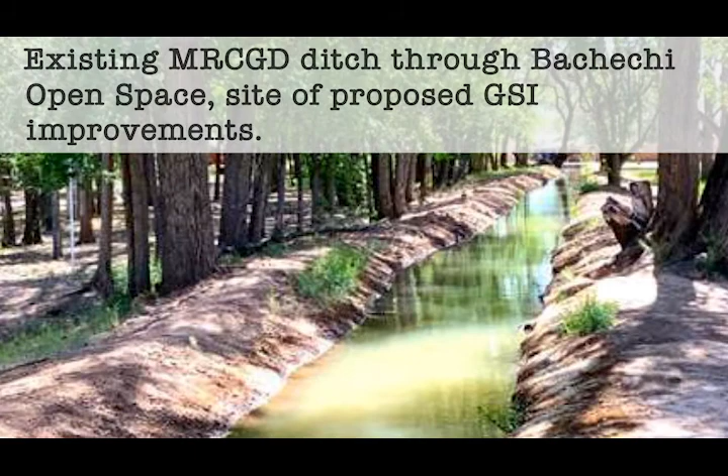This study was commissioned by Bernalillo County Natural Resource Services and was started and completed in 2020 during the age of COVID. The existing issue with the Alameda Boulevard storm drain outfall is that it discharges almost directly to the Rio Grande Bosque, and there's limited treatment of the stormwater flows before discharging to the Rio Grande.

The goal of this study was to identify opportunities to improve the water quality downstream of the pump station at the outfall, and to use Green Stormwater Infrastructure, or GSI, to provide those water quality improvements.

Part of the study was to evaluate the feasibility of various green stormwater infrastructure practices, as well as provide recommendations to the county for future implementation.

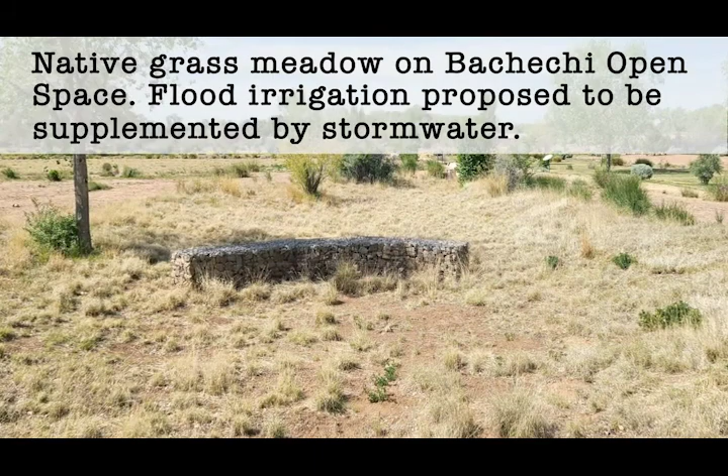The opportunities identified as part of the study are essentially that there's land available at the outfall and in close proximity for implementation of a treatment train utilizing a combination of infiltration or stormwater harvesting basins, bioswales, and a sedimentation system, a more engineered system, as part of the overall treatment train approach.

The outcome of the study were the three concepts you're seeing on the screen: one for a treatment train within the Rio Grande Bosque, another for a treatment train on Bachechi Open Space, which is a Bernalillo County maintained and managed open space, and then a third with a more confined or smaller footprint also in the Bosque.

The study outcome was a report that will allow Bernalillo County to seek funding and to plan for these improvements and construction in future years.

The 4th Street Master Plan was created to be a blueprint for the revitalization of this remnant of the much celebrated Route 66 into a center of Los Ranchos activity, with the lofty goal of providing an economically, socially, and environmentally sustainable Main Street. The plan envisions a street that is well integrated into its surroundings while providing a foil for commerce and civic activity.

At the same time, it sustains its landscape through a water-sensitive approach to design and construction, an example of how doing the right thing can coalesce our precious water resources with aesthetics and land use benefits. It is a street and a pedestrian corridor.

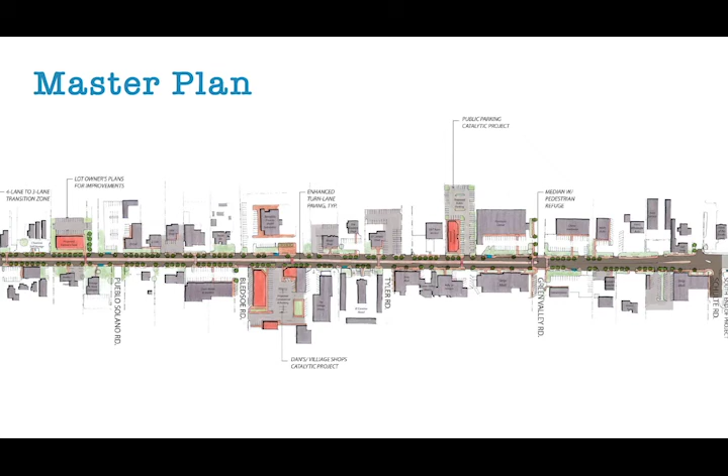It is also a water sponge and a water safety conveyance that will age gracefully into its North Valley home in such a way that it is greener and more water conservative than traditional streets.

Before this project was built, the street was wide with 4 lanes of traffic, no lighting, no sidewalks or any form of pedestrianism, no stormwater treatment of any kind. Landscaping was pretty much non-existent, and street flooding caused many users to run for the high ground. There were also bars on many of the windows of buildings and vacant properties throughout the corridor.

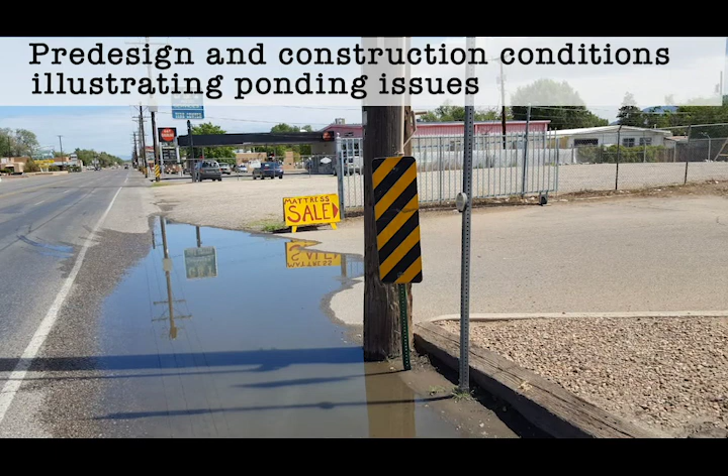Parcel and building owners were very hesitant to make any improvements on the street until there was some change to it. The 4th Street revitalization envisions walkable and safe spaces for pedestrians, beautiful permeable pavements in both walkways and street sections.

Places to sit and enjoy a cup of coffee or a meal, edible landscaping, shade, on-street parking as well as a new village parking lot which is also permeable, lighting, green infrastructure, slower traffic and bus stops for the many transit users along the street, and other amenities.

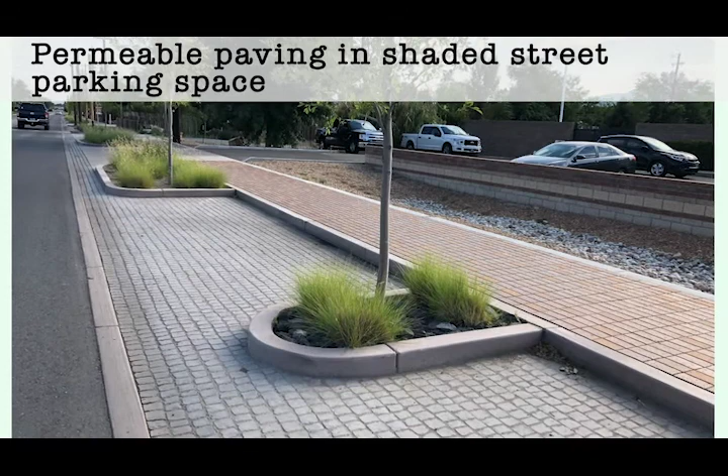The landscape, modeled after the village's agrarian roots, uses grasses and herbs as metaphors for fields and gardens, and fruit trees as symbols of the orchards that are interspersed throughout Los Ranchos.

The street also imagines events which should take place from time to time, and linkages to points to the south, like the forthcoming village center for Los Ranchos. In the next few slides, we will illustrate some of the features of this remarkable new street.

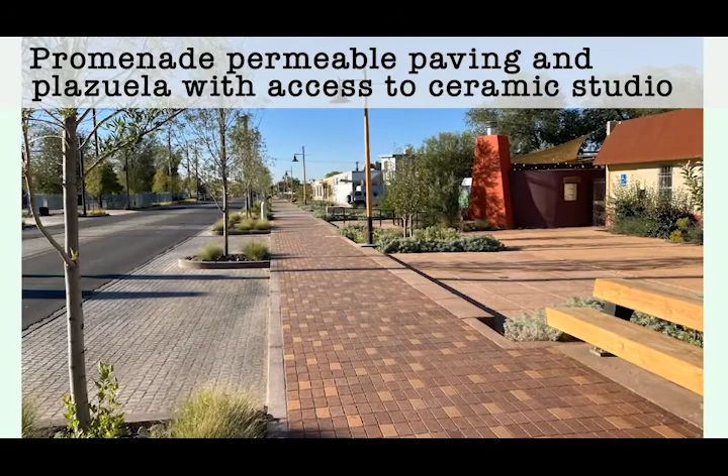The permeable street gutters, parking spaces, and other parts of the street section of the streetscape are reimagined as water collection devices, street basins if you will, as well as tasteful and well-designed additions to the stormwater system. Perhaps as important, they are also locally manufactured.

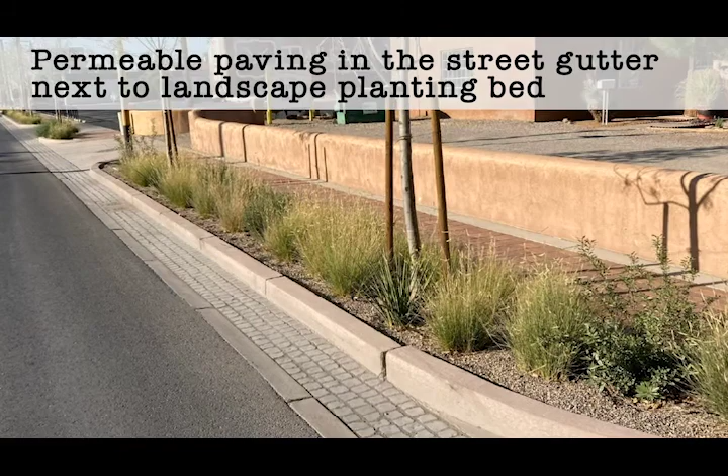When it rains, these areas collect water from impermeable street sections and drain it through these cobblestone street basins, and then let stormwater gently drain to subsurface collection systems through the permeable grout at the cobblestones.

We should also note that the grout is designed in two lifts to allow drainage, but also to capture dirt and dust through a finer surface lens that will then be collected by the Village of Los Ranchos maintenance staff.

The subsurface structures below the cobblestone basins then collect stormwater through filter fabric protected gravel, and finally into perforated pipe passive irrigation systems that then deposit the stormwater in planting beds through subsurface wicks, and finally to subsurface reservoirs that drain surplus water into valley groundwater, our aquifer, to create a sustainable approach for both passive irrigation and groundwater injection.

There are 10 collection systems, 5 on each side of the street, organized throughout the corridor. Each subsurface reservoir has maintenance manholes to allow the village access for cleaning.

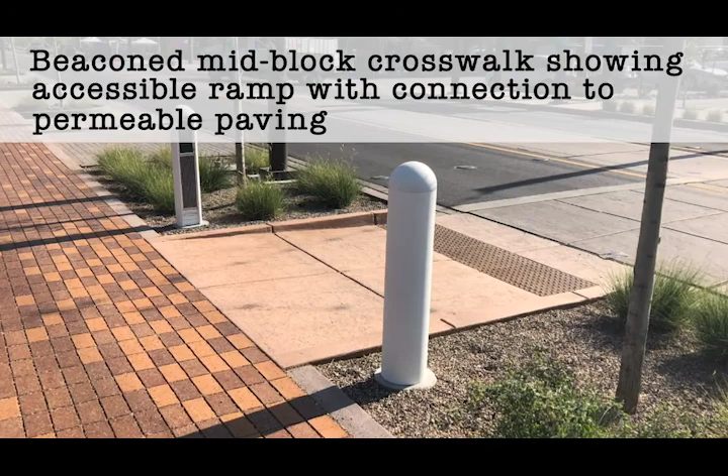There is also a smaller subsurface drainage system in the promenade, designed similarly to collect water and deposit it through wicks into planting beds with fruit trees, herbs, and other edible plants. These planters are also demonstrations of the larger agricultural farms throughout the valley.

The 4th Street Revitalization Project not only changed the face of this historic remnant of a past highway system, it also shows a way forward to a more sustainable future. The project improves the pedestrian experience and at the same time uses permeable pavement to return storm flows to where they are needed. It provides parking in a logical progression of spaces down the street, and it also cures the street's prior stormwater problems as it feeds landscaping and the aquifer beneath the valley floor.

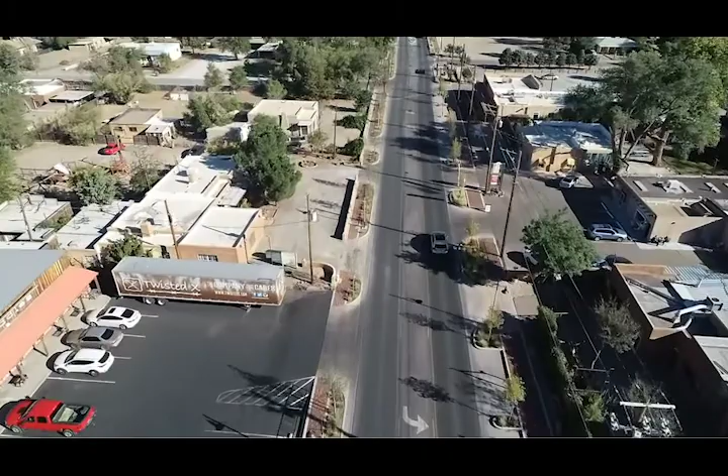This project is not only a street, it is a living room for the village and a great room for others to visit. The thing that makes this part of 4th Street special is that it is not just about LID. It is not only about improved safety or lighting or landscaping. It provides Los Ranchos with multiple layers of positive change that sets the village up for its future as one of the special places in the Albuquerque metropolitan area.

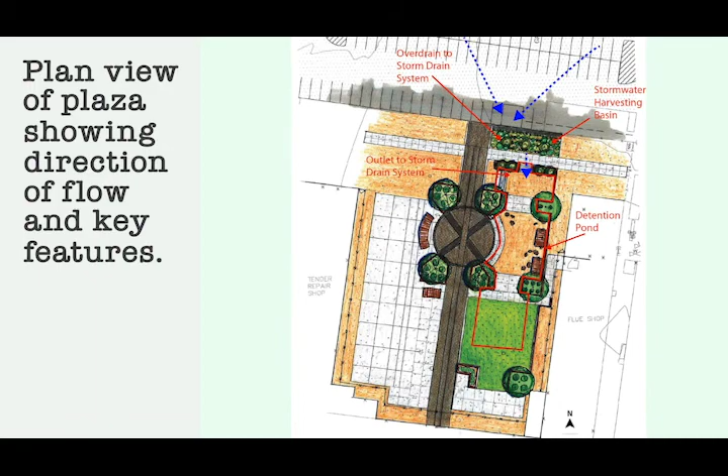A strip of basalt aggregate forms a sediment trap along the edge of the parking lot. Eventually, the basalt will become stained by pollutants in parking lot runoff, but the dark color of the aggregate won't show the staining like lighter color aggregates do. The sediment trap also collects trash like cigarette butts.

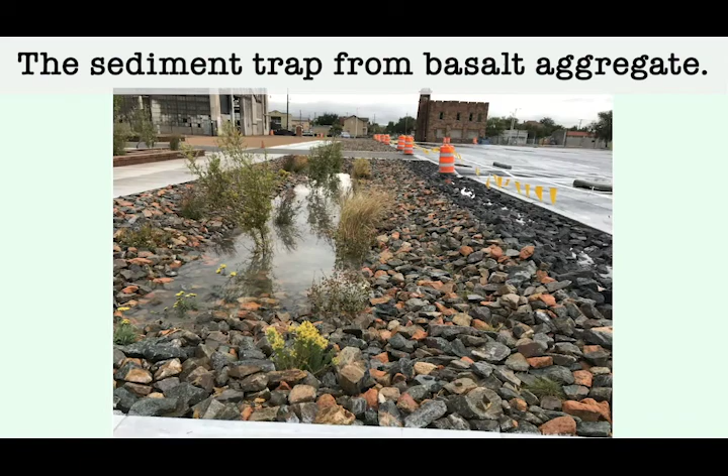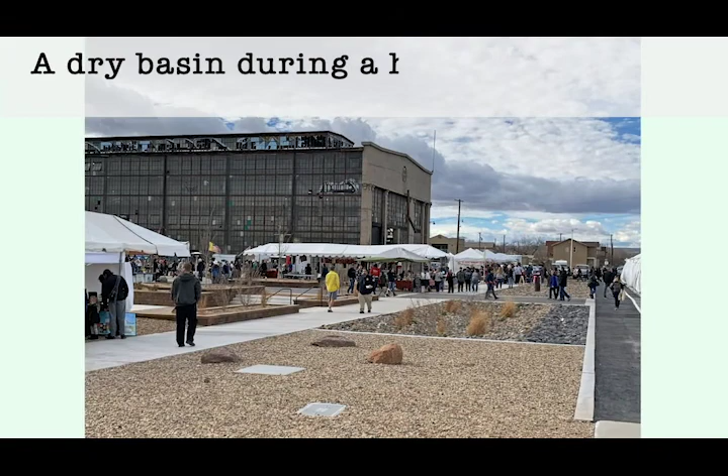This pre-COVID photo of a craft fair at the plaza highlights the visibility and educational potential of the stormwater harvesting basin.

The beehive overdrain, seen in the foreground, connects to the storm drain system. Runoff that enters the overdrain has been filtered by plants and mulch so that the water being discharged to the river contains fewer pollutants. A symmetrical planting design ties into the symmetrical plaza design and would make it easier to identify any unintentional plants which may be weeds.

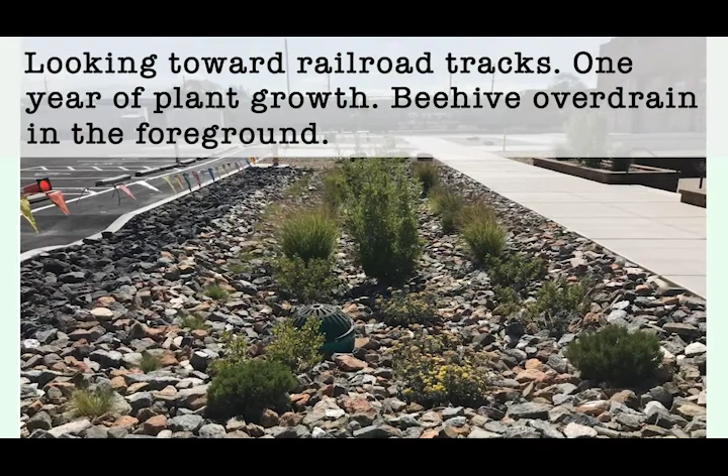The plants selected for this basin tolerate inundation and provide a buffer between the parking lot and plaza. Large trees were considered, but not ultimately included due to the utility lines running under the basin.

The plaza was designed to accommodate gatherings of many sizes and types. We hope that soon these events will be allowed to safely happen once again, and that you will be able to attend a gathering at the plaza at the rail yards.

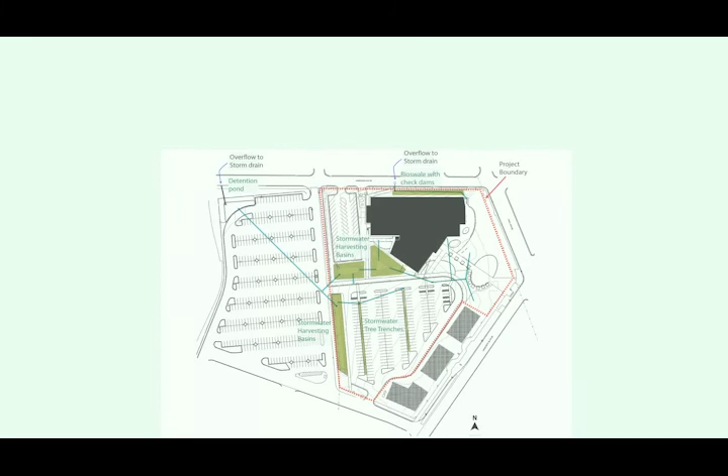This site plan shows parking lot and roof runoff being directed to tree trenches and stormwater harvesting basins that are connected to one another by a series of piped drains to create a treatment train. Overflow from these features is directed to a traditional detention basin in the northwest corner of the site before entering the storm drain system. The combination of gray and green infrastructure allowed for flexibility to meet grading limitations.

The two main stormwater harvesting basins were seeded with native grasses and wildflowers and planted with oak and desert willow trees. Soil sponges in the basins help to promote infiltration. This basin is closest to the building and is the smaller of the two basins.

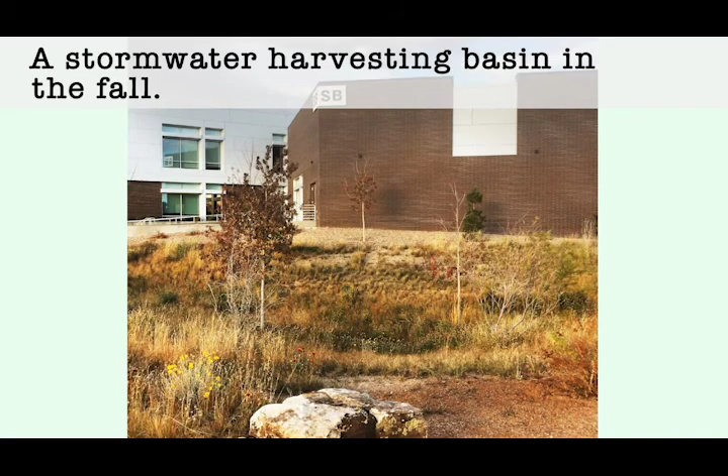The revegetation seeding received irrigation for a 2-year establishment period, but now survives on precipitation alone. C&M maintenance staff did thorough hand weeding for 2 years, which allowed the grasses to become dominant. The trees and shrubs in and around the basin have permanent irrigation. This project was certified LEED Gold, and on-site stormwater management was only one of the sustainability goals that were met.

Last summer, cattails were found to be growing in one of the basins, adding to the habitat benefit provided by this landscape.

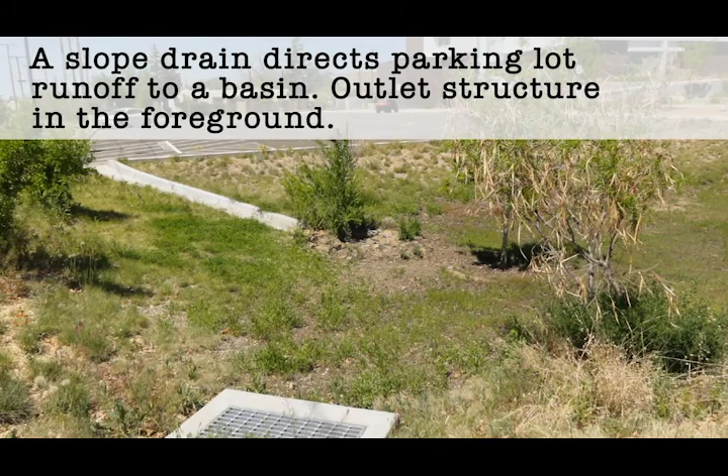The second stormwater harvesting basin receives overflow from the first basin, as well as runoff from the two parking lot areas. As you can see in this photo, runoff from one of the parking lots enters the basin through a sloped drain. Overflow enters the outlet control structure in the foreground, which is piped to a detention basin in the northwest corner of the site.

The C&M Sustainability Program added interpretive signage to the project to increase the educational impact of the landscape.

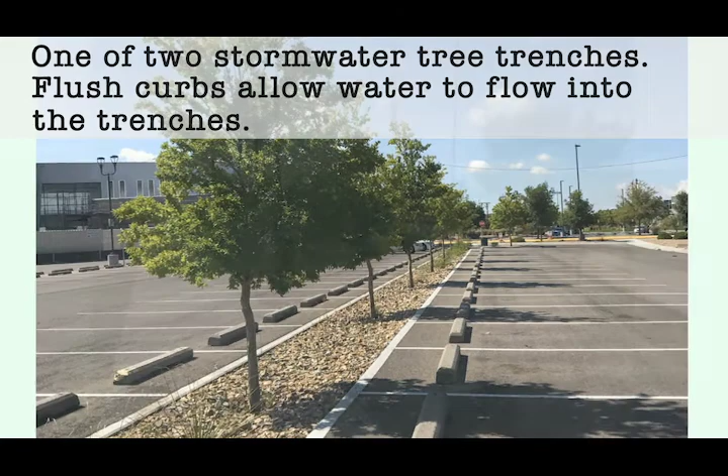Collaboration between the architect, engineer, and landscape architect allowed integration of water harvesting features throughout the site in order to capture and filter stormwater.

The result is a beautiful landscape that also functions to filter pollutants, decrease potable water use, mitigate heat, and provide habitat.

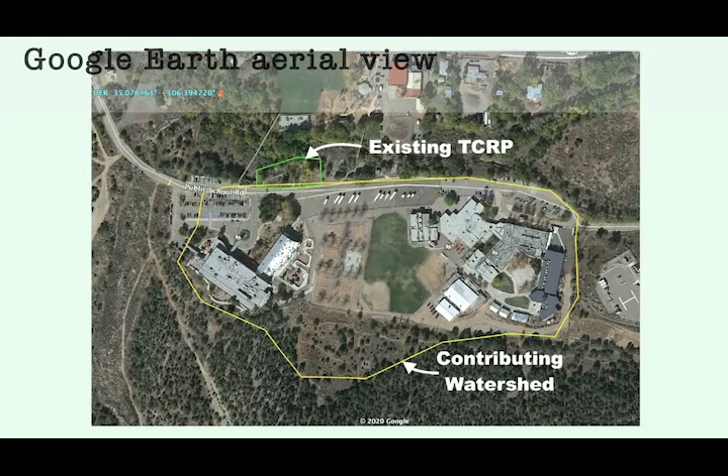The Tijeras Creek Remediation Project serves as a publicly accessible model demonstration of an integrated stormwater treatment train. The site itself is constructed on less than three-quarters of an acre and provides the watershed services for over 20 acres of impervious surface.

The project consists of surge basins and bioswales, all networked together in a sinuous manner with progressively larger basins one after another to maximize the settling out of solids in the stormwater, as well as allowing for a more focused biological response to help mitigate both the pollution and increase permeability of the soils.

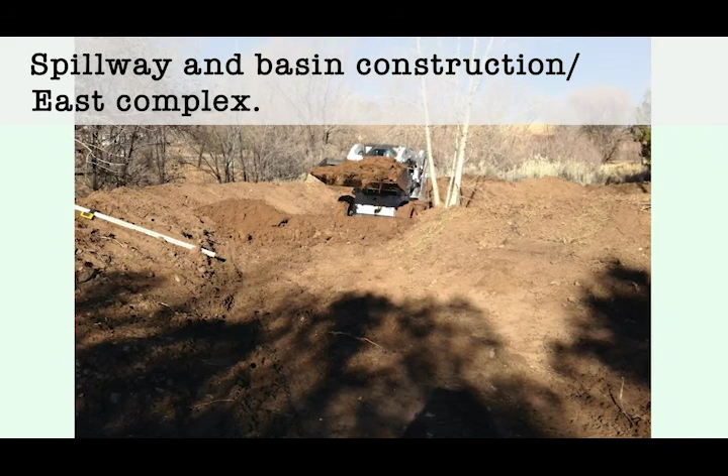The construction was done mostly by volunteers and by the project manager and staff.

Maintenance is primarily the removal of trash, monitoring growth of vegetation on spillways to control the elevational height, and removal of invasive species. This site was characterized by Siberian elm infestation, which you can see the magnitude of.

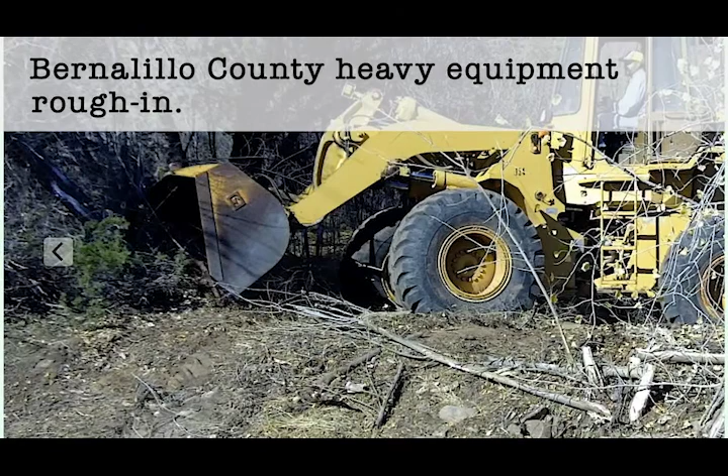We have soil sponges installed throughout the low water areas. Those really contribute to improved permeability as well as increasing field capacity, the water holding capacity of the soils, and the infiltration and exfiltration rates have increased hugely through the last 6 or 7 years while this has been built.

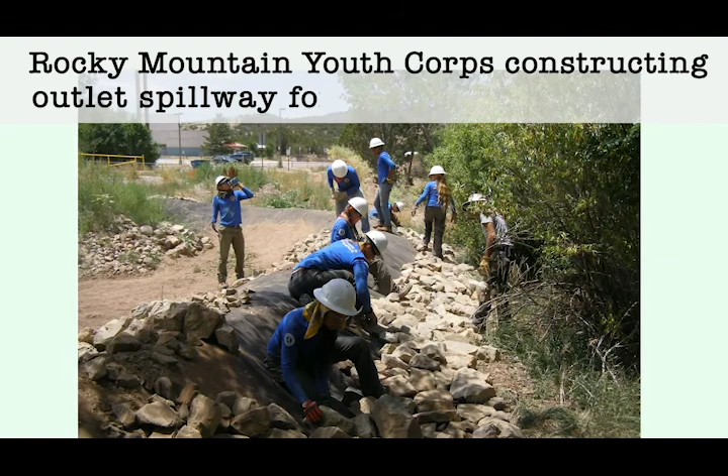Through the hands of many volunteers, the Rocky Mountain Youth Corps, UNM, Nature Conservancy, Bernalillo County Master Naturalists, and many others have contributed while going through an educational opportunity.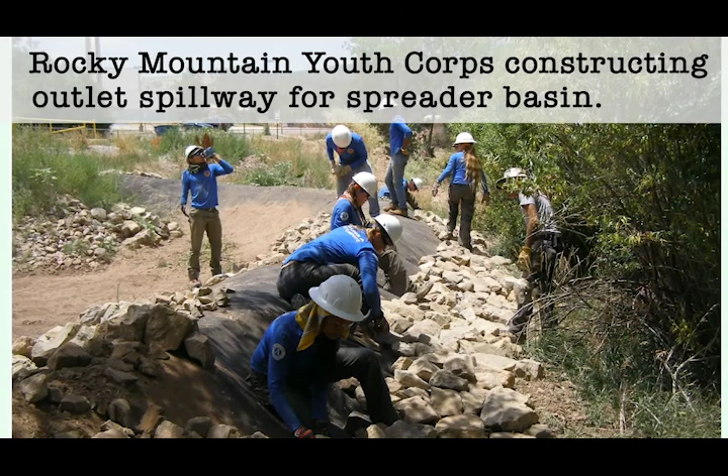People are able to see that this project is actually achievable. You can have a beautiful stormwater flow instead of gray infrastructure. We're delivering much cleaner water to the creek, as you can see in some of the footage.

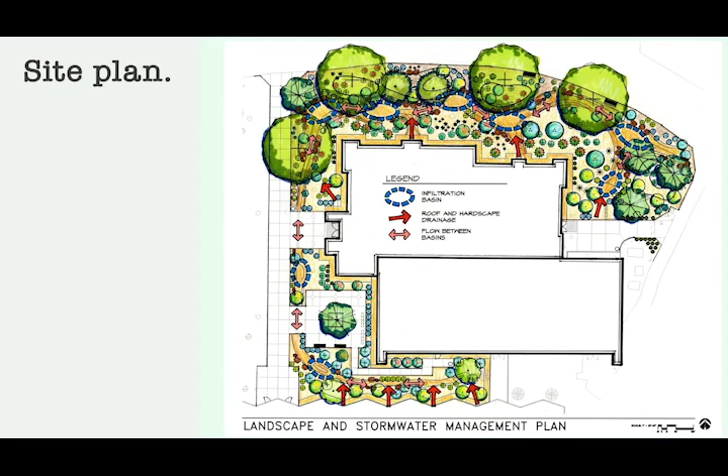This was the first significant water harvesting landscape constructed on the UNM campus. This project was certified LEED Platinum. At the time construction was completed in 2010, this was the first LEED Platinum certified project in New Mexico.

A canyon-like condition is created between the south side of the College of Education and the north side of Travelstead Hall. The swale collects roof runoff from both buildings. The runoff from Travelstead Hall falls from canales into raised metal collector basins that overflow into the swale.

Native and low water use plants in the landscape north of the building create a habitat pocket. Plants lining the swale receive supplemental irrigation from roof runoff.

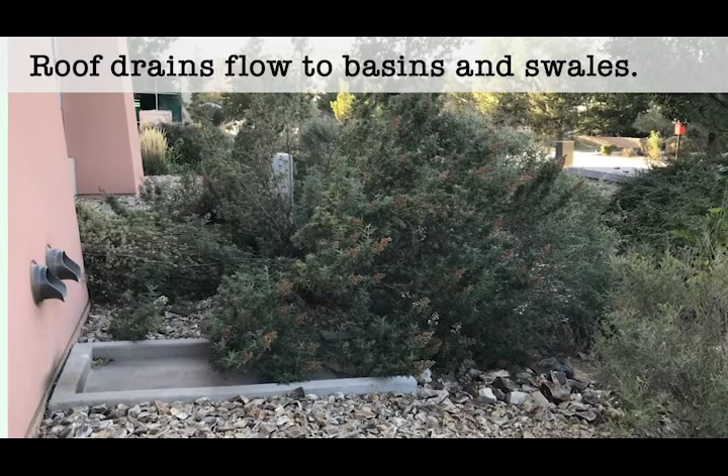This project incorporated organic mulch in the landscape adjacent to the swale. At the time of design, organic mulches were not used in campus landscapes. In the years since this landscape was installed, organic mulches have become commonly used on campus, and UNM now generates organic mulches for use on campus landscapes.

Here you see a swale along the north side of the building with adjacent native and low water use plants. This metal basin mounted on a concrete block catches runoff from a roof downspout above the basin. Water flows from the metal basin into the swale that wraps the building.

This video shows the roof spout above the metal basin and the path that runoff takes as it flows from the basin into the swale and around the building.

We hope you enjoyed this virtual tour of the UNM College of Education and encourage you to go visit the project in person.

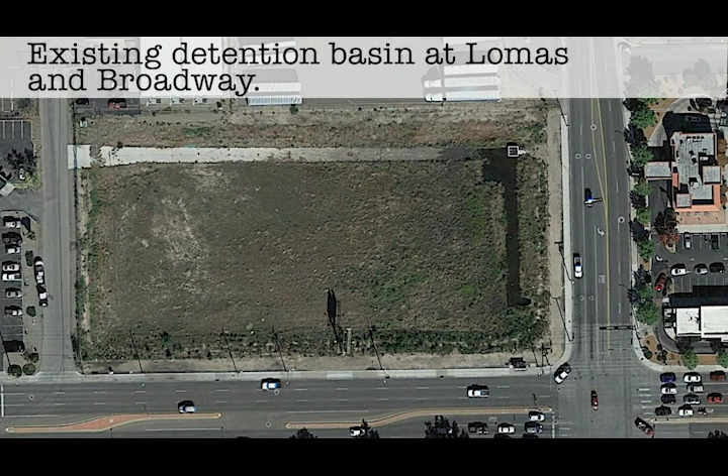Detention basins offer a highly efficient means of managing stormwater during infrequent but intense storm events, holding the excess water only until it can safely be returned to the drainage infrastructure network. However, these basins require significant area, are typically closed off to the public, and don't offer many benefits to the community or ecosystem. But what if they could? And what would that look like?

Take for instance the 2.7-acre detention basin at the northwest corner of Lomas and Broadway in downtown Albuquerque. Right now, it's basically a big hole in the ground at a very prominent intersection. As Albuquerque only sees an average of 50 days of rain per year, this basin's actually only in service for 10% of the time. But what about the other 90% of the year when the space is not in service? And what about all that water?

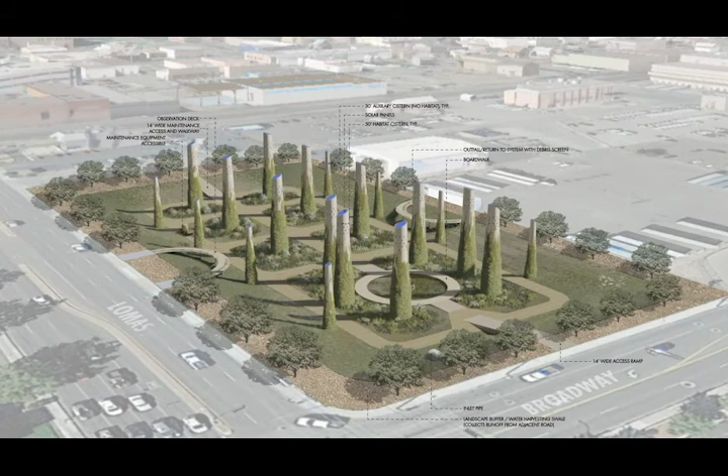Could we take advantage of the 15 acre-feet that inundates the basin during each event and use it to create something more? The Water Cathedral is a response to this challenge and may serve as a prototype for detention basins around the world, especially in denser urban areas where extra space isn't always available.

The purpose of this project was to reimagine what a traditional stormwater detention basin could be and to create a place of refuge for urban inhabitants, both human and non-human alike. It also seeks to showcase critical water infrastructure and hydrology processes by celebrating the ephemeral storm events that activate the basin, fostering opportunities for people to interact with what is typically hidden away or not easily understood.

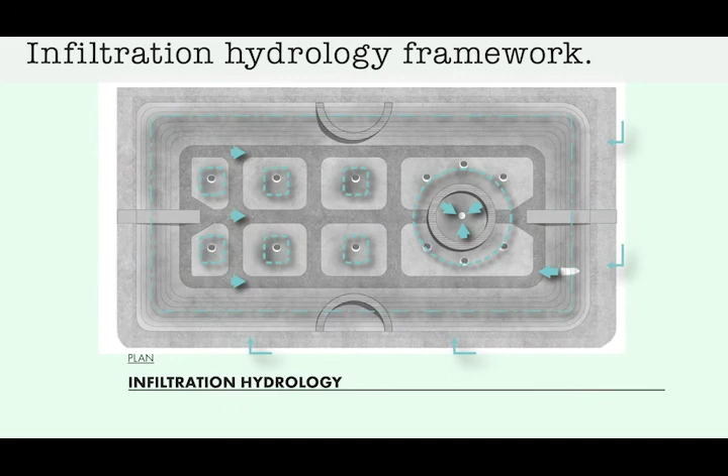The overall design framework is driven by the site hydrology and uses both passive and active stormwater management techniques. In addition to maintaining the original function of the basin, several other strategies are utilized. First, stormwater from the surrounding roadways at the top of the basin is conveyed and infiltrated through a continuous swale which supports a vegetated buffer around the site. The overflow is then carried into the larger basin.

Secondly, the bottom of the primary basin is comprised of a series of smaller connected microbasins that allow for increased infiltration time after the flooded basin has emptied. The third is a system of vertical cisterns located at the center of each microbasin, designed to capture and store a large percentage of the stormwater that inundates the basin during each event, storing water vertically rather than horizontally.

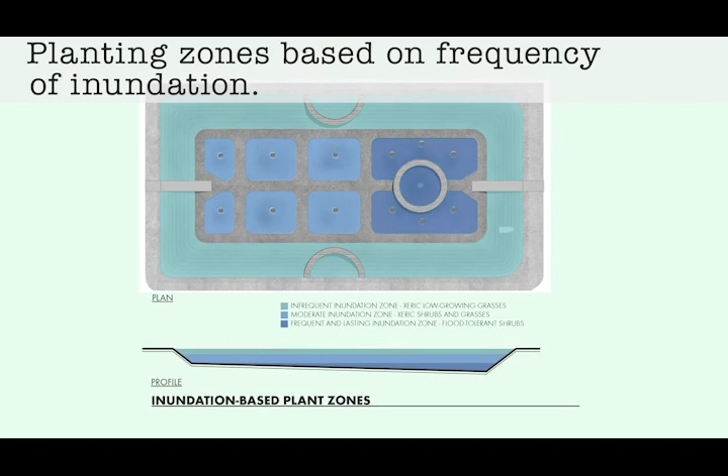The planting palette and landscape typologies are based on inundation tolerance and the basin's frequency and intensity of inundation. For example, less tolerant species are placed at higher elevations where the basin water level does not usually reach. More hydrophilic species are cultivated in the microbasins at the lower elevations, where inundation will be more frequent.

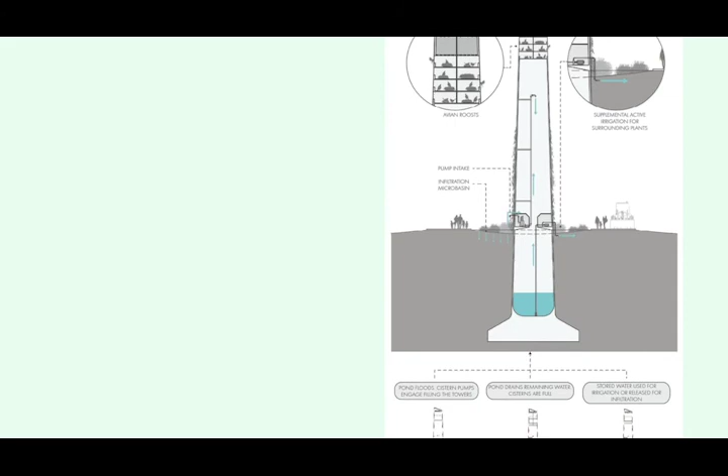The primary active water storage features are the habitat cisterns, designed to function like trees, soaking up water when activated by flooding and slowly releasing it to support their foliage, while serving as a roost for avian and bat species. Collectively, they store 576,000 gallons or 1.75 acre-feet when full, adding almost 12% to the basin's normal capacity.

From just one large event, the habitat cisterns can provide enough water to be used throughout the year to irrigate and sustain the surrounding habitat areas with zero reliance on potable water.

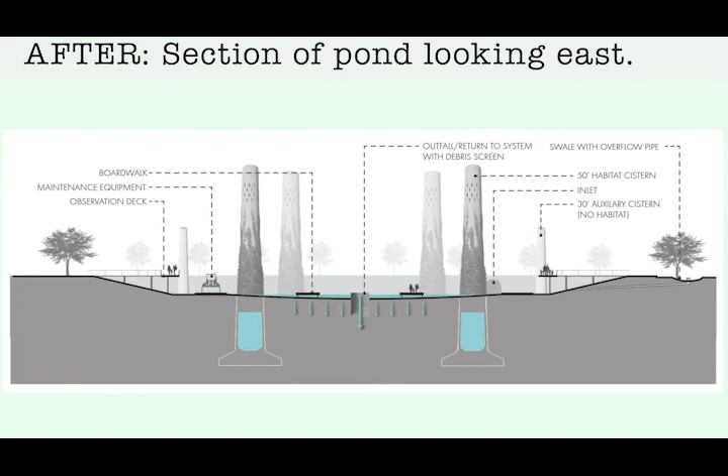In looking at the elevations of the project, we can now see in more detail how the various water management strategies are interconnected and apply the principles of GSI and LID. Additionally, elements such as the observation deck, boardwalk, and the striking forms of the habitat cisterns demonstrate how this new typology can create interest to provide an effective means of interacting with water infrastructure and urban wildlife.

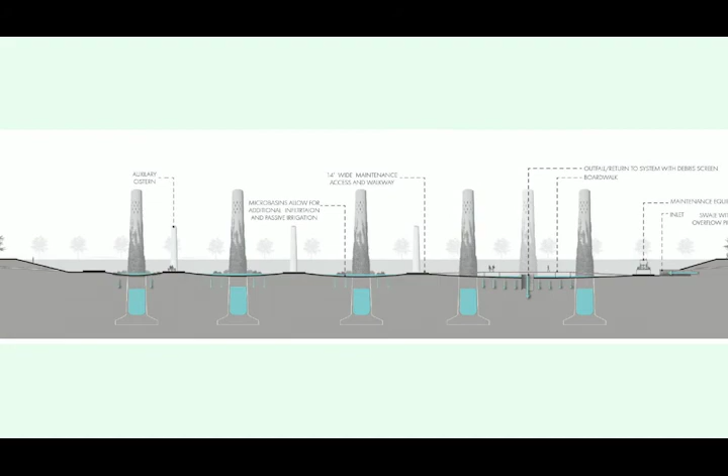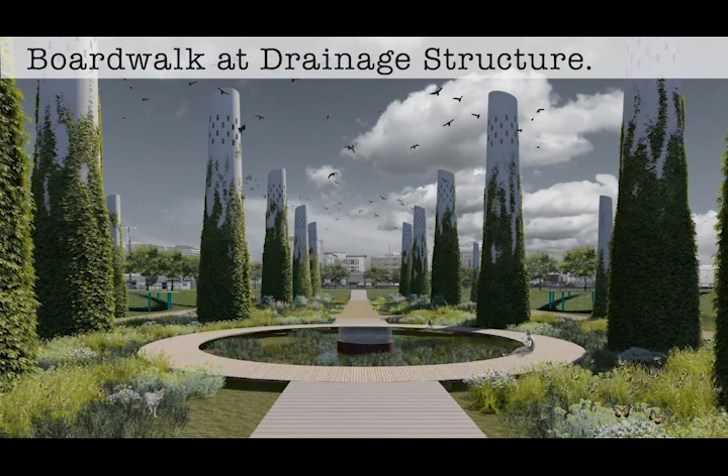Resembling the ruins of a Gothic cathedral, the column-shaped habitat cisterns create an appealing aesthetic and sense of enclosure, offering an experience of promenade along a central axis to the drainage outlet of the basin as a focal point and art piece, or altar, symbolic of the preciousness of water in the desert. With a raised boardwalk surrounding the drainage structure, the basin is also accessible even when the residual stormwater has not completely infiltrated.

In closing, infrastructure doesn't have to be boring and sterile. It can be much more, and the Water Cathedral shows us proof of that. When it's dry, let's make it a usable space. When it's flooded, let's celebrate the valuable function it plays in keeping us safe while at the same time reusing and returning every possible drop to the surrounding soils, not someplace far downstream.

So the next time you pass this site, or one like it, please ask yourself, or perhaps the flood control engineer sitting next to you, what more could it be, and what can we do to help?

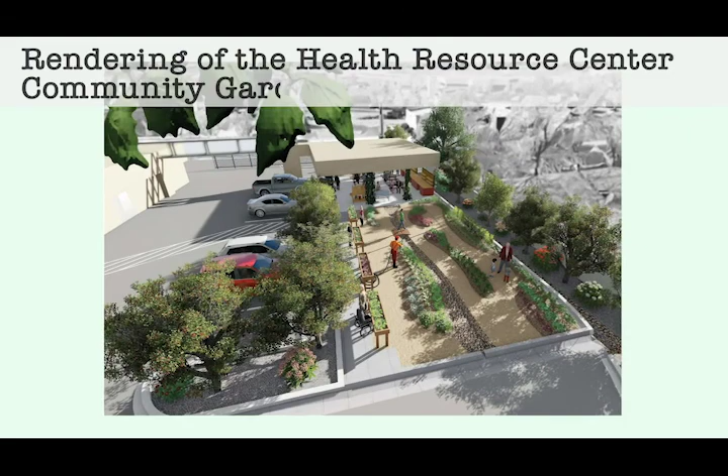As you can see in the rendering, the garden was constructed in what used to be a bank drive-through, so it provided a really great opportunity to demonstrate soil remediation and water harvesting, and the relationship those practices have with each other in support of growing edible plants in an urban environment.

All of the water from the roof of the resource center and the parking lot is directed to the pollinator garden area along the western edge of the site and the water catchment basin at the south. The land within the vegetable garden area is contoured to keep the water that falls there in the garden.

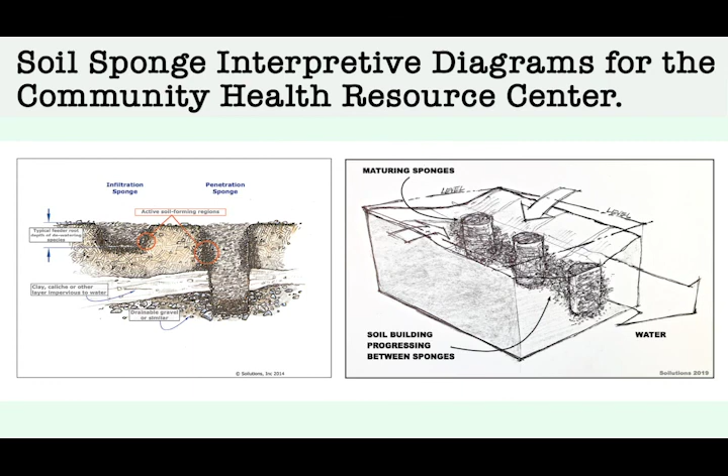Once people saw how simple the sponge installation is, they said, well, I can do that at home, I can do that in the parking lot. A temporary irrigation system was also installed to irrigate the sponges and provide that much needed activation of microbes to initiate the remediation process.

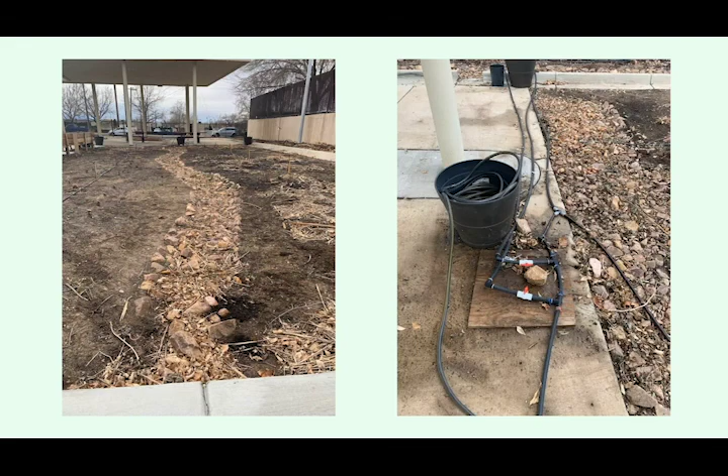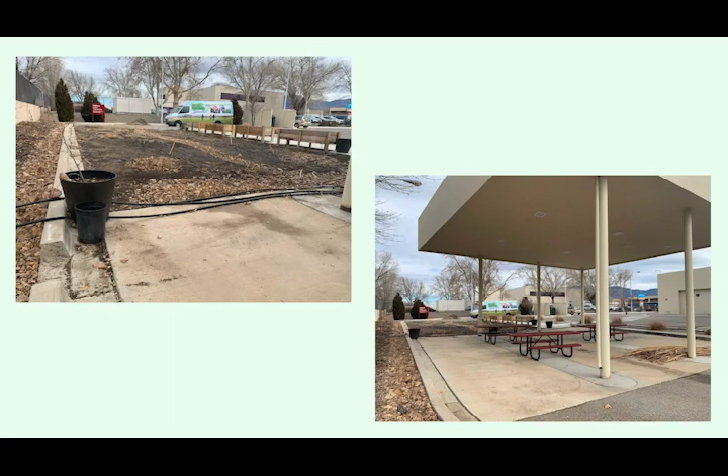Cost of water was the top barrier identified, with broken irrigation system not far behind for urban gardeners, making the integration of passive water harvesting and urban agriculture projects critical for garden sustainability. So this project was really key in helping our team make recommendations for how Bernalillo County can support the inclusion of water harvesting in community urban agriculture.

And just a quick plug for the Presbyterian Health Resource Center, if folks aren't familiar with it, it provides access to resources like teaching kitchens, community meeting and activity space, and a food pharmacy, which is a referral-based food pantry that provides healthy food to those who are food insecure. The location is also a stop for the Healthy Here program's mobile farmers market.

Hello, my name is Aaron Kaufman. I am the founder of Southwest Urban Hydrology, a business that focuses on green infrastructure and remediating the impacts of urban growth on watershed health. I also happen to be a graduate of Santa Fe High School.

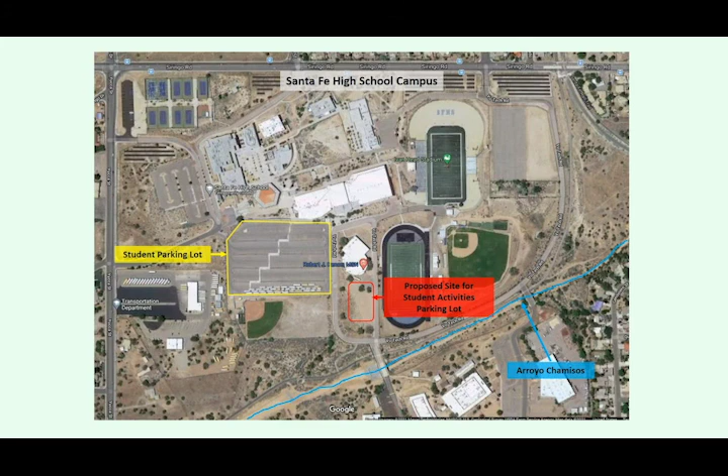The Santa Fe High School campus is roughly 80 acres and comprises numerous impervious surfaces, including staff, student, and activities parking lots. The parking lots discharge large volumes of stormwater, lack habitat value, and contribute to urban heat island effect.

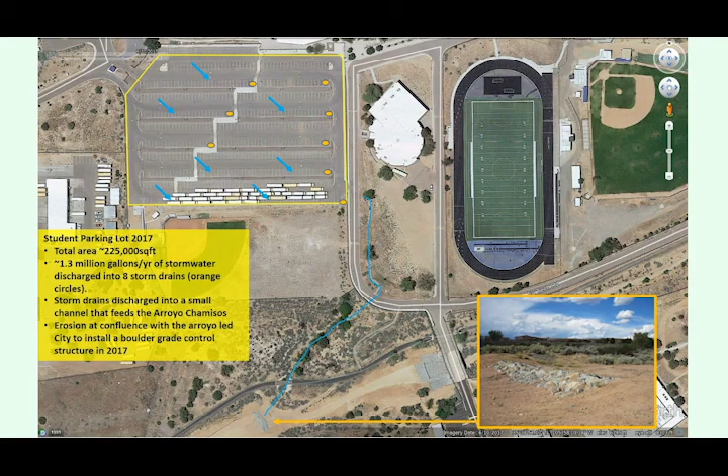Severe erosion in the channel led the city of Santa Fe to spend over $1 million to stabilize several stretches of the arroyo, including a section near the Santa Fe High School campus. In July 2018, a high-intensity 3-inch storm event caused widespread damage in Santa Fe, including parts of a boulder grade control structure in the Arroyo Chamisos.

While this singular event was not the catalyst for changing the parking lots at Santa Fe High School, there was a growing recognition among members of the facilities department that stormwater harvesting principles could reduce erosion and contribute to irrigation for improving tree cover.

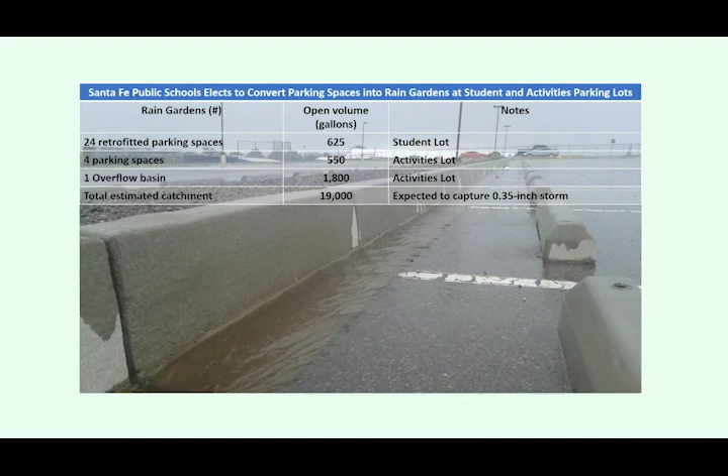In 2019, a total of 24 parking spaces were retrofitted across 4 terraces in the student parking lot. Each rain garden was intended to capture runoff from about 13 adjacent parking spaces, or roughly 3,500 square feet. 4 additional rain gardens, as well as 1 larger basin, were included as part of the new activities parking lot. On average, the basins are intended to help capture about a 1/3 inch storm from all parking surfaces.

Parking spaces in the student lot were given a new curb and gutter border. Approximately 20 inches of underlying soil and base course was excavated and removed from each parking space. Limestone boulders were hand-selected to be used as decorative dry stacked borders as part of the sediment traps.

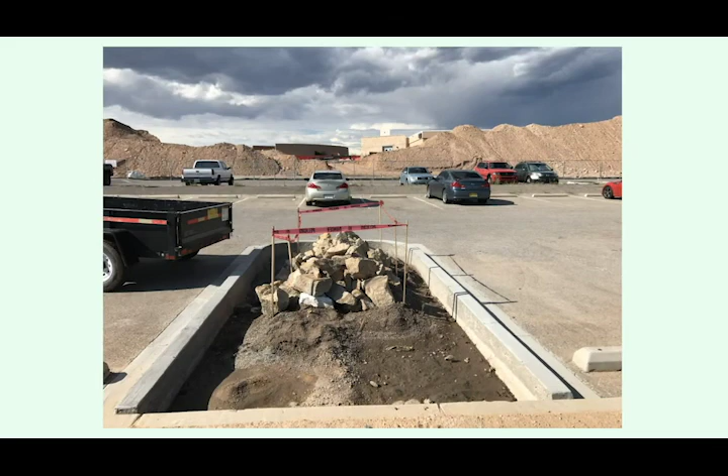Approximately 2 cubic yards of compost was added to improve soil nutrients in each rain garden. Some of the compost was purchased from a local business that utilized food scraps from Santa Fe Public Schools. A small excavator was used to loosen soils 2 to 3 feet in depth for better infiltration and easy root expansion.

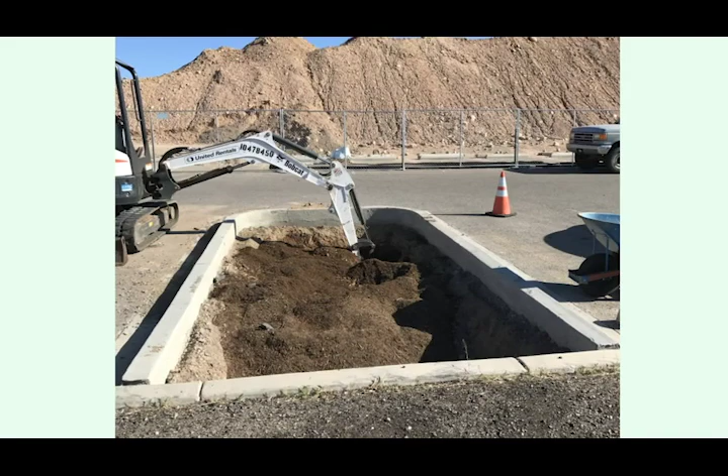Each basin received a 2-inch caliper tree. Species were selected to be drought tolerant and capable of withstanding temporary inundation during storm events. A cobble mulch was hand-placed in the basins to prolong soil moisture between storm events and prevent erosion during high-intensity storms.

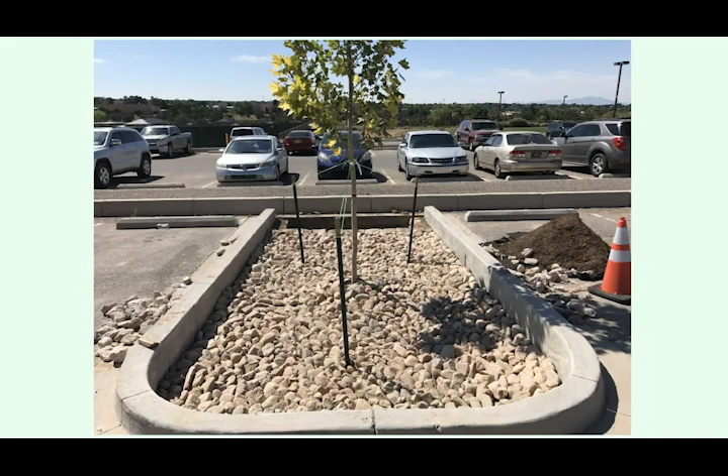One-gallon bunch grasses were used in sediment traps to help remediate stormwater pollutants. A variety of 5-gallon shrubs were selected to improve pollinator habitat and provide forage for birds or other wildlife.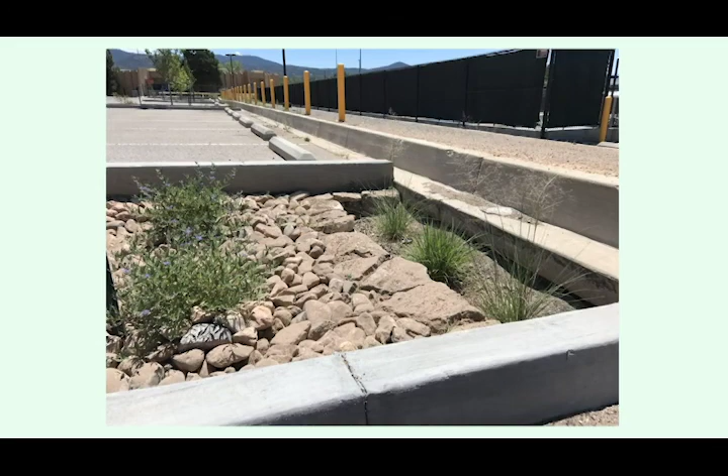In addition to remediating stormwater pollutants, the tall bunch grasses in the sediment traps are intended to divert pedestrians away from the deepest parts of the basin. During the winter, the sediment trap grasses provide great color while other plants are dormant.

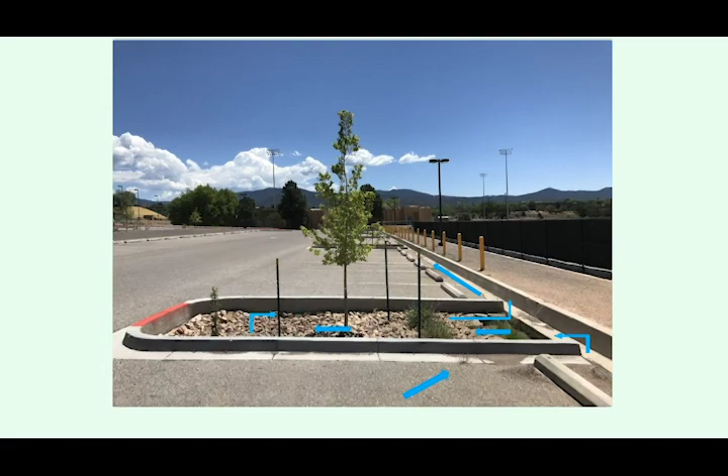Stormwater from about 3,500 square feet is directed along the original curb and gutter where an inlet and outlet exist. A small cement baffle in the gutter directs water into the rain garden sediment traps. After a basin fills, excess stormwater will flow to the next rain garden or to a storm drain.

Standing water in the rain gardens during large storm events will reach about 6 inches in depth before stormwater overflows. The base of trees were planted 1 or 2 inches below the elevation of the gutters to ensure that they would not be inundated for long periods of time. Most rain gardens drain in less than 24 hours.

2020 was exceptionally dry. However, soils in the rain gardens were moist and probably could have supported established vegetation without supplemental irrigation. 100% of plants were alive as vegetation entered dormancy in the fall of 2020.

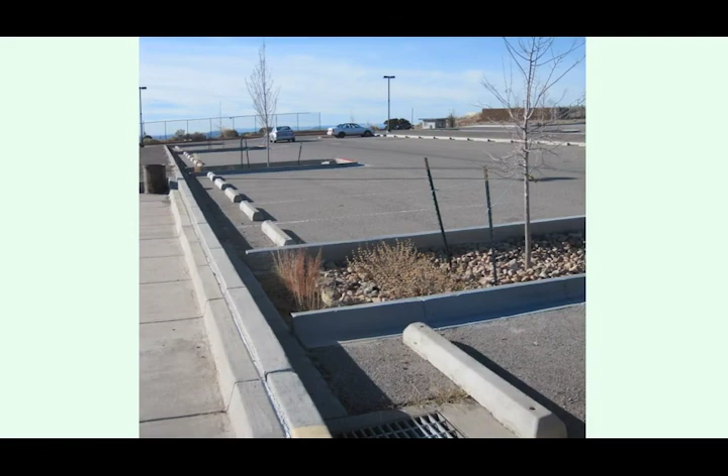Trees did not exhibit much growth during the first year. However, most of the grasses and shrubs grew vigorously and provided flowers for pollinators. While the trees are still young, the underlying surfaces appear to be maintaining slightly cooler temperatures, which bodes well for future remediation of urban heat island effect caused by the parking area.

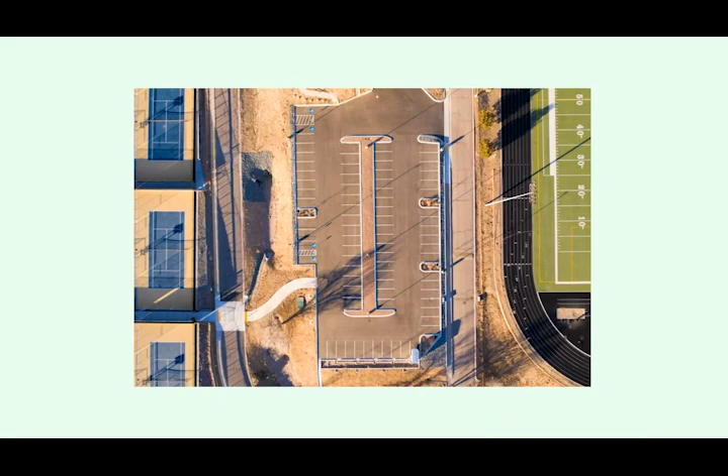The final basin completed as part of the rain garden project at Santa Fe High School was a 96-foot long, 6-foot wide rain garden on the south end of the activities parking lot.

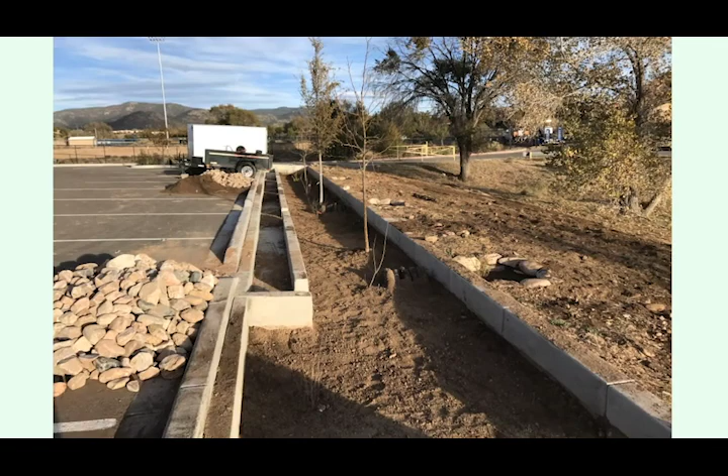The basin was excavated and trees were planted during the first week of November 2020. Student volunteers visited the site a week later and planted the remaining vegetation before mulching the area. The basin has an open volume that exceeds 2,000 gallons, which should support 3 trees, 10 flowering and fruiting shrubs, and numerous bunch grasses.

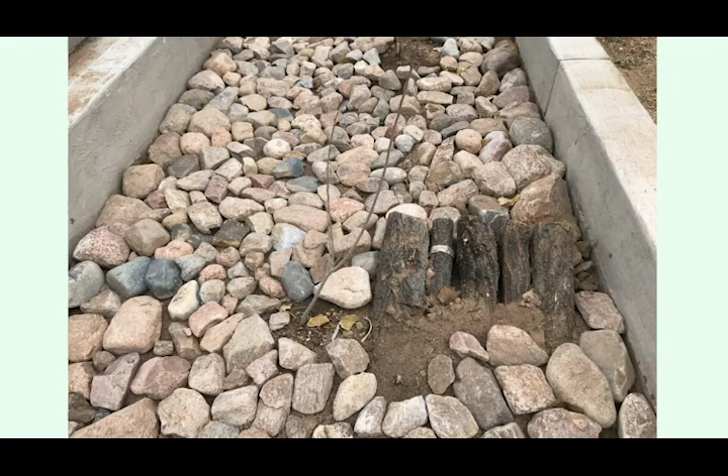In addition to the vegetation, Southwest Urban Hydrology partnered with Reese Baker of the Raincatcher to inoculate 5-foot-long Siberian elm logs with 2 types of oyster mushrooms. The hope is that these fungi could serve as another way of remediating stormwater pollutants while also utilizing wood from areas where elms have become invasive.